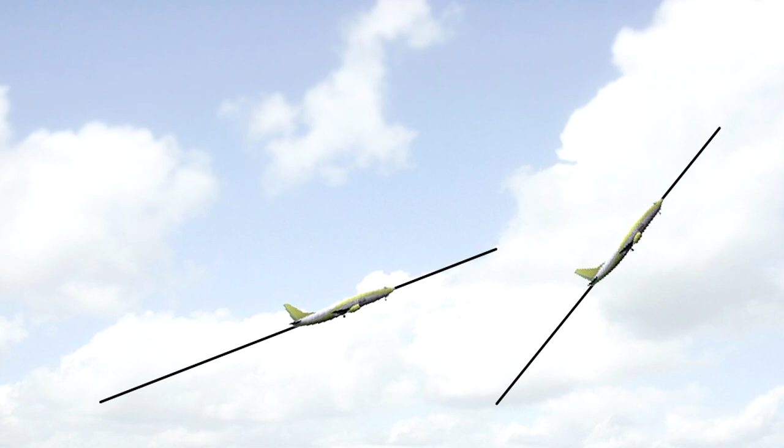Nevertheless, if two identical aeroplanes have the same forward speed, but the aeroplane on the right travels along a steeper angle, in a given time, the aeroplane on the right climbs through a higher vertical distance than the aeroplane on the left. Therefore, the aeroplane on the right has a higher rate of climb. This demonstrates that angle of climb is also an important factor in the rate of climb.

From this simple demonstration, it can be seen that the rate of climb is a function of both angle of climb and the speed along the achieved gradient. Let's return to the formula for the gradient of climb, which is shown here. The gradient is given by the formula thrust available minus thrust required divided by weight.

All that is needed now is to add the velocity function, as is shown here. This is now the formula for the rate of climb. However, there is a little more detail to explain. The velocity in this case is true airspeed. Thrust and drag are both forces. Velocity is distance over time. Force multiplied by distance gives work. Work divided by time gives power.

This means that instead of thrust multiplied by velocity, the formula now contains the expression power available, and instead of thrust required multiplied by velocity, the formula now has power required. The formula now reads power available minus power required, which gives excess power, divided by weight.

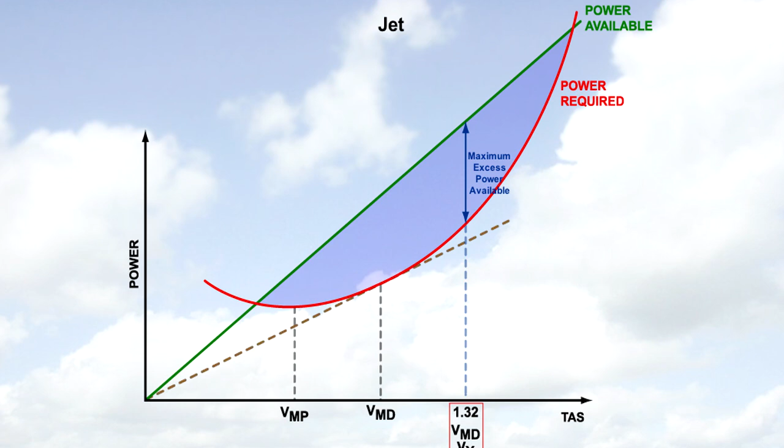As we've already learnt, Vy is the speed for the best rate of climb. For a propeller aeroplane, you'll notice that this speed occurs at Vmd. It's important to remember where Vy is found for both jet and propeller aeroplanes.

For example, looking at the graph, it can be seen that if a propeller aeroplane were climbing at a speed equal to Vmp, and then selected a slightly higher speed, the excess power would increase, and the rate of climb would increase. It's easy to see how speed changes affect both excess power and the rate of climb when the graph is used. Be aware of what the graphs look like, so that you can use them to your advantage in test situations.

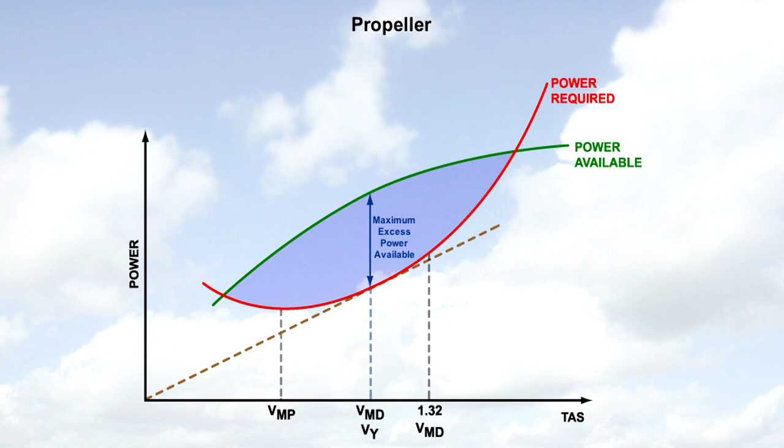Let's now examine what factors can influence the rate of climb. The first of these factors is aeroplane weight. You'll recall that an increase in weight creates more weight-apparent drag, which reduces the angle of climb. For any given airspeed, if the angle of climb reduces, then so will the rate of climb, because they are both fundamentally linked.

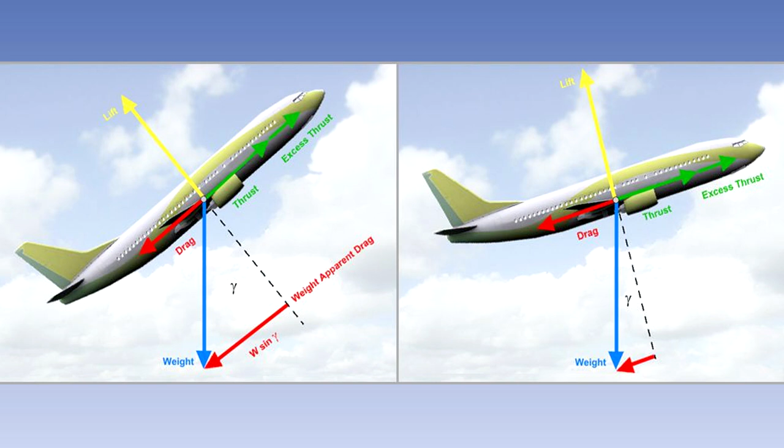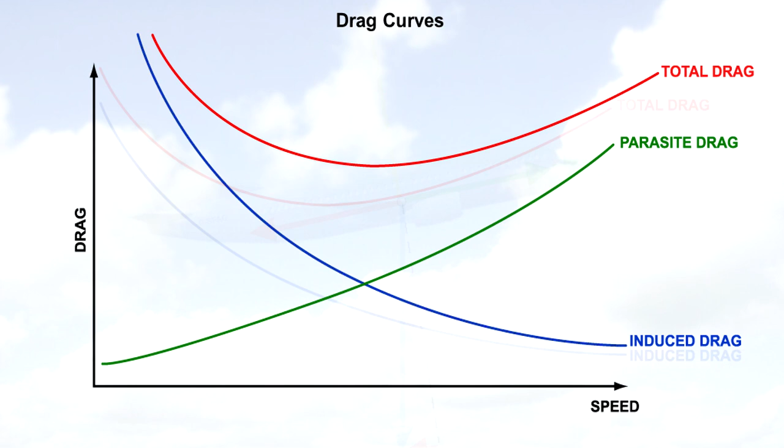Weight has a further effect, though, that we've already talked about. An increase in weight will require an increase in lift. Increasing lift increases induced drag, which causes the drag curve to move up and to the right. The power required curve, shown in red, is actually based upon drag. Power required is drag multiplied by velocity. So, if the drag curve moves up and to the right, so will the power required curve.

This results in less excess power available, and therefore a decrease in the rate of climb. The power graphs for both jet and propeller demonstrate this. However, it's important to see that the speed for maximum excess power available is no longer what it was. It's now higher. So, with higher weight, the rate of climb is decreased, but Vy is increased.

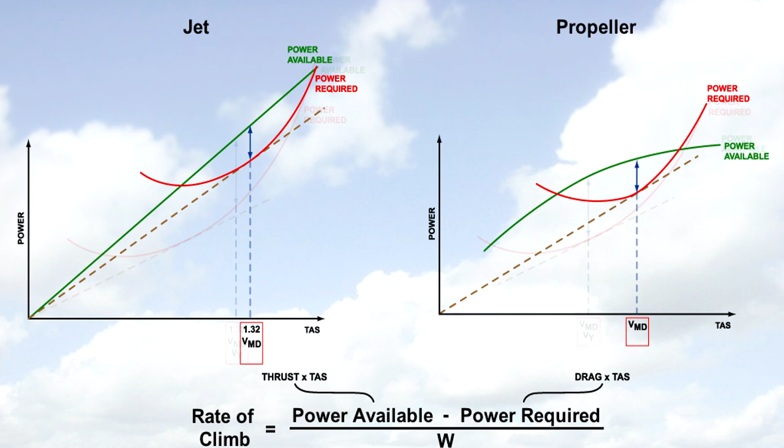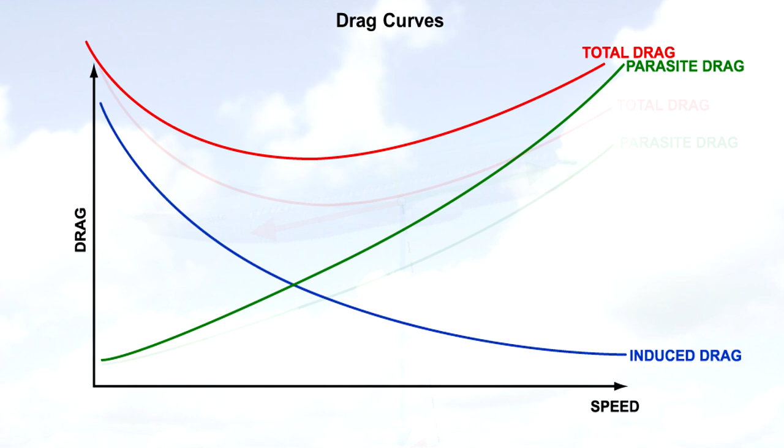The next factor that affects the rate of climb is the configuration of the aircraft. In other words, the use of flaps and undercarriage. If the undercarriage and flaps are deployed, then the profile drag of the aeroplane will increase. This increases total drag, and the drag curve moves upwards and to the left. The power required curves will follow the same movement as the drag curve.

Notice the reduction in excess power available, as is shown by the blue double-headed arrows. You may recall that a reduction in excess power reduces the rate of climb of the aeroplane. However, the important effect here is that the speed for maximum excess power is no longer the same. It's now lower. So, with the undercarriage and/or flaps deployed, the rate of climb is decreased, and Vy is decreased.

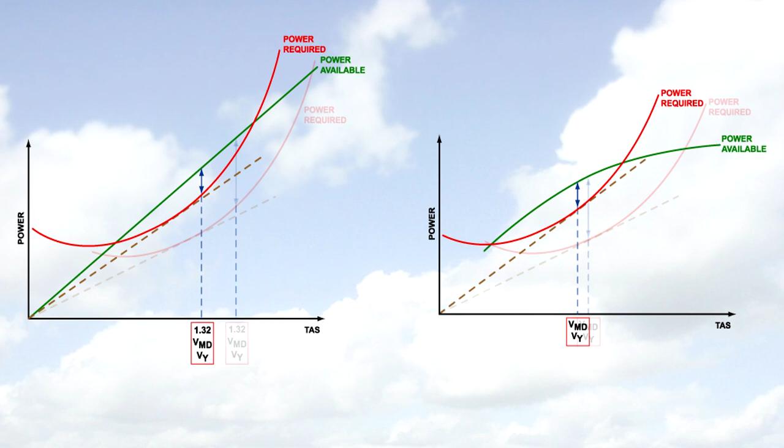If you use flaps for takeoff, remove them in stages when you've attained a positive stable climb, ensuring that you check through the aeroplane flight manual for the correct actions for your aeroplane. As you retract the flaps, the rate of climb and the speed to attain the best rate of climb will increase, so you should accelerate to ensure you remain at Vy.